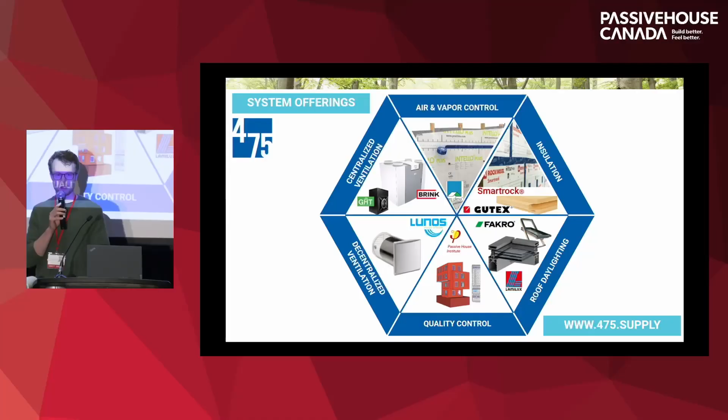And we'll get right into it, talking about 475. So we are, in a lot of cases, sort of a one-stop shop for high performance or passive house building components. And this hexagon here is just demonstrating a lot of the materials that we've got all throughout Canada and the US. So you can see there's a bit of a theme here.

We've got envelope materials, so air and vapor control from Pro Clima, insulation. We've got skylights from Fakro and Lamilux too, which are Passive House certified components. And then every great envelope needs a set of lungs as well. So we've got Brink ventilation ERVs and HRVs with GHT preconditioners, which we'll have Gabby talk about a little bit, who's the Brink general manager joining us from California for this entire conference.

So I'll really quickly dive into the Pro Clima system first. So we're quite well known for Pro Clima at this point. We've been distributing it to North America since 2011. And it is a high-performance tape and membrane system that's manufactured in Germany. And this slide right here kind of demonstrates some aspects of the system.

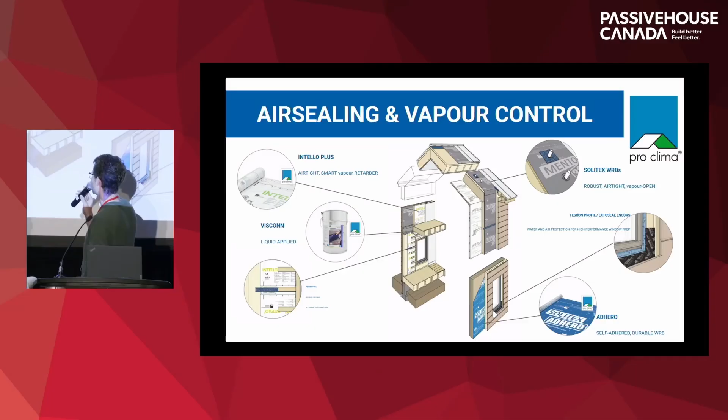So we've got exterior WRBs, liquid applied air barriers for trickier spots, which comes in handy on a lot of retrofits and things like that. And then once you connect things up with tape and sealants, you've got a pretty nice airtight envelope that's also vapor open or vapor variable to allow moisture to get through those wall and roof assemblies.

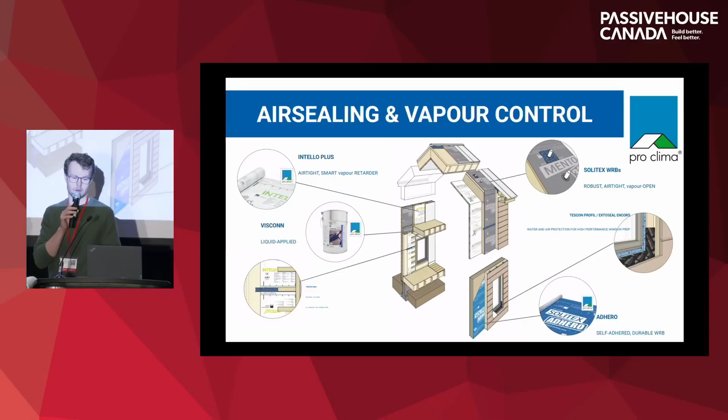So I will quickly go over to this mock-up here, just go through some of the materials that we do have. So we're quite well known for the Intello membrane, which is a smart vapor barrier. So this is something that has the ability to either be vapor open or vapor closed. And what dictates this vapor variability is optimizing of the drying potential within the wall.

So in a lot of these airtight buildings, you want to make sure that there's also some type of vapor management within the building envelope to ensure that that moisture can get out. And this is something that Intello will do in pretty much any climate in Canada. And we're quite well known for our gaskets as well, which you can see here.

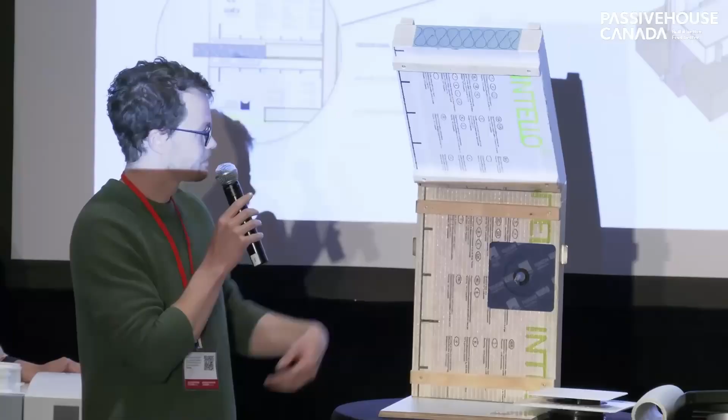And then I can't unfortunately flip it, or I'll give it a shot quickly. But just taking a look at our exterior membranes as well. So yeah, these are vapor open monolithic membranes that are used both on the roof and the wall. And this detail we actually see quite a bit in these more high performance builds where you've got this continuity from the roof assembly on the outside going all the way down the wall. Just helps make sure that things stay continuous there.

So I briefly talked about a lot of the products that we've got, but we're also very well known for the knowledge resources that we have for the high-performance building community. So if you take a look on our website, 475.supply, at any time, you'll see that actually the bulk of the website is dedicated to the knowledge resources that we have. So you'll see that we've got quite a few blog posts, tailored towards not just architects, but builders as well.

So we've got a great product consultant, Nick, in Asheville, North Carolina, who has a lot of experience with carpentry, and he's utilizing that knowledge that he's gained to help with buildability details for these high-performance buildings. So yeah, we've got blog posts on general building science and constructability, just to try and make passive house and high performance as simple as possible in the capacity that we can.

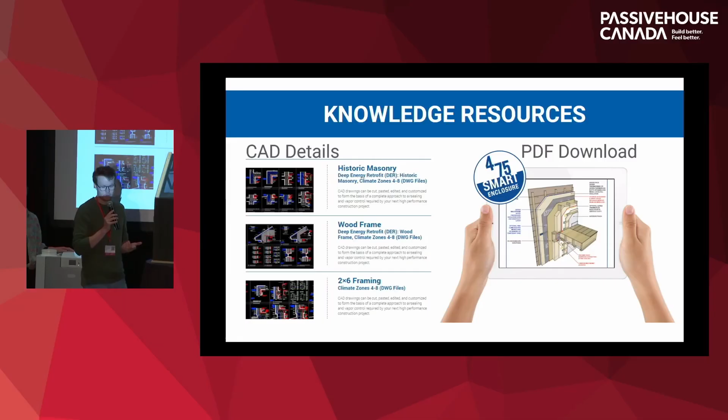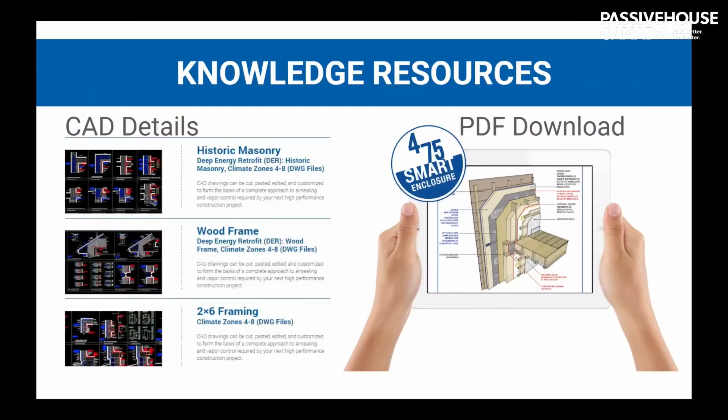So one of the knowledge resources that we're best known for as well are these ebooks, which are highlighted in this slide here. So these are 60 to 70 page documents that have a whole bunch of different tried and true details that have been used on high performance buildings all throughout North America for pretty much any construction methodology that you would see in North America as well.

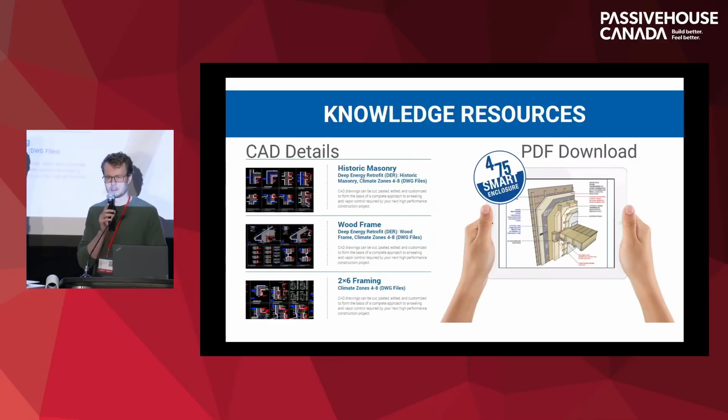So we've got an ebook for historic masonry retrofits, we've got an ebook for double stud walls and Larsen truss walls, and this is meant to be a really great design aid for the architects and builders so that they can really hash out the details that help to make these buildings not only more airtight but also more resilient and durable. And they're also available for free on the website. So you can download these PDF versions and CAD versions, and you've got access to them forever.

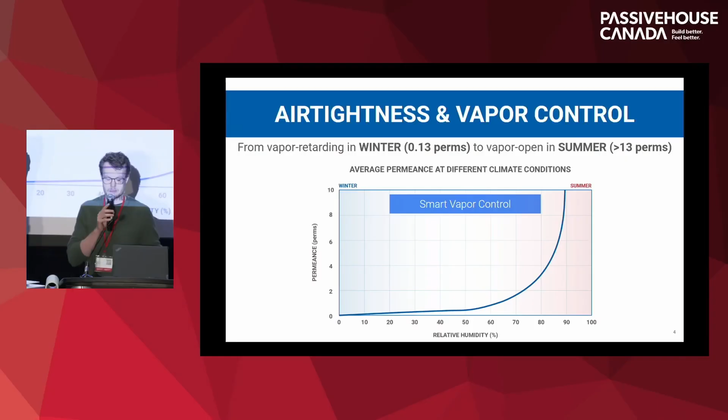So I'll quickly touch on this topic of smart vapor control, or vapor variability as well, just because it's kind of very important to the whole philosophy around 475 and what we believe in terms of high performance yet durable buildings. So this is just essentially highlighting how the membrane works, being more vapor closed in the wintertime, acting like a traditional vapor barrier, but then opening right up if there are days or weeks when there's high humidity, just to make sure that it stays out of the walls.

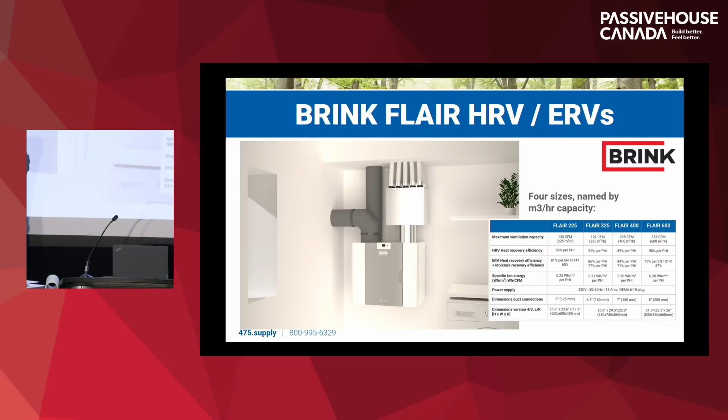So I'm going to pass it over really quickly to Gabby, who is going to talk about this lovely Brink unit that we've got up here as well. All right, hello, Gabby Jang. I am the Brink team manager.

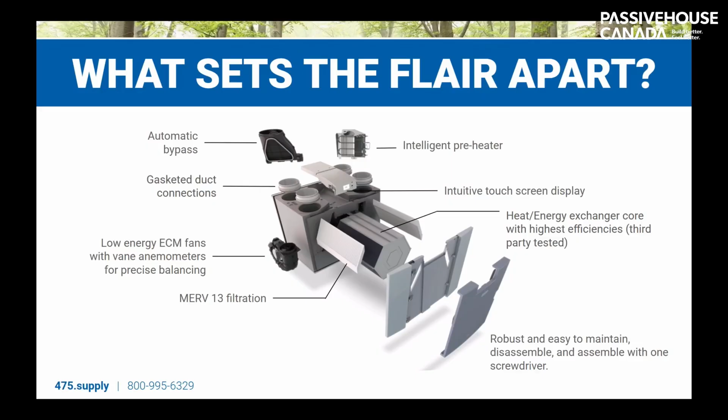What's going to tell the fans to ramp up is going to be the vane anemometers at the ends of the fans. That's going to tell the unit if there's additional static pressure, either caused by the ductwork or even filters getting dirty. The fans are going to ramp up so that you always get the airflow that you programmed into the unit. It'll also balance the airflows, which increases the efficiency.

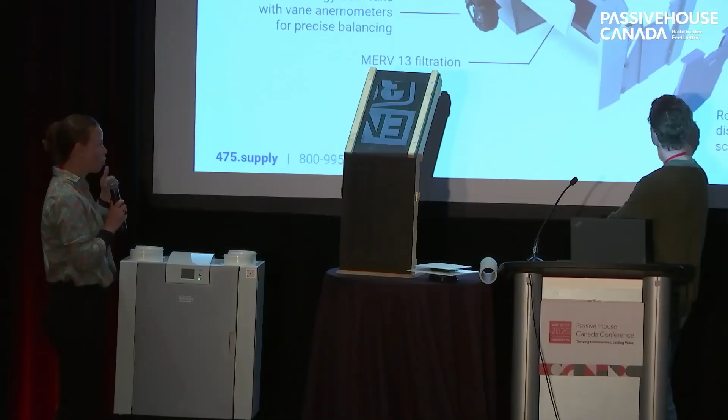We have a top performing core. We have automatic bypass and a built-in intelligent preheater that turns on when needed. So very robust unit, insulated core, airtight core, which means very little leakage. And these units are Passive House Institute certified, so you can see the efficiencies. Third-party testing is very crucial. And then we also tested some of the units to get HVI certification, so that's another third-party testing. The 225 is an HVI certified ERV here.

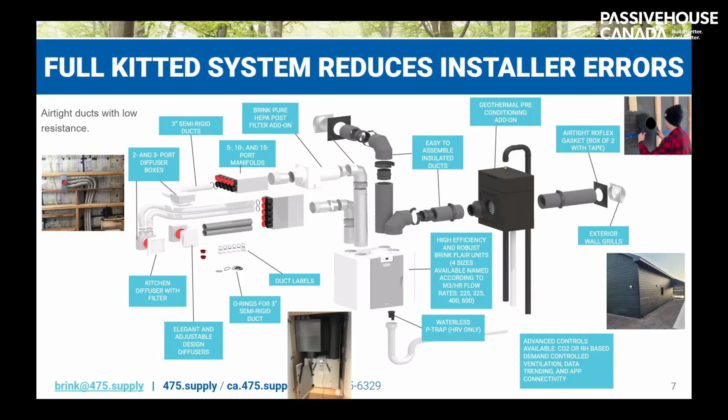This shows the home run distribution system that we supply, fully stocked in Canada here. You don't have to use our ducting system, but we do provide a full kit, and from the design, create that takeoff so everything can be delivered on site. Everything you need is there. It reduces installer errors. We tell you the number of ducts to bring to each space. As you can see, there's an optional geothermal preconditioning system, which I'll talk about in the next slide.